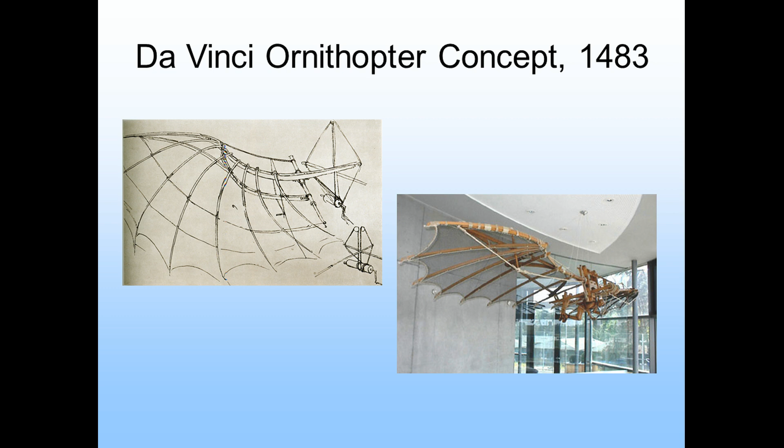So if you're going to buy an ornithopter of your own, you'd go to a science store, or maybe the gift shop at the Science Museum, and buy these plastic ornithopters made in France. They have a little rubber band, and they're called Tim birds. The Tim birds really don't differ in fundamental principle from this aircraft, just in the material.

All right, let's look at past ornithopters, particularly admirable human-carrying ornithopters by Alexander Lippisch. I suppose this is the one place where I don't have to say who he is, but just for completeness, he is a pioneering aircraft designer who developed tailless aircraft, later delta wing aircraft, and ground effect aircraft—what they call WIG, wing in ground effect type aircraft.

But he also had a lifelong interest in ornithopters, and I always found that encouraging, because even though ornithopters became marginalized after the discoveries of Sir George Cayley about separating thrust from lift, some people still maintained an interest in exploring the possibilities of mechanical flapping wing flight.

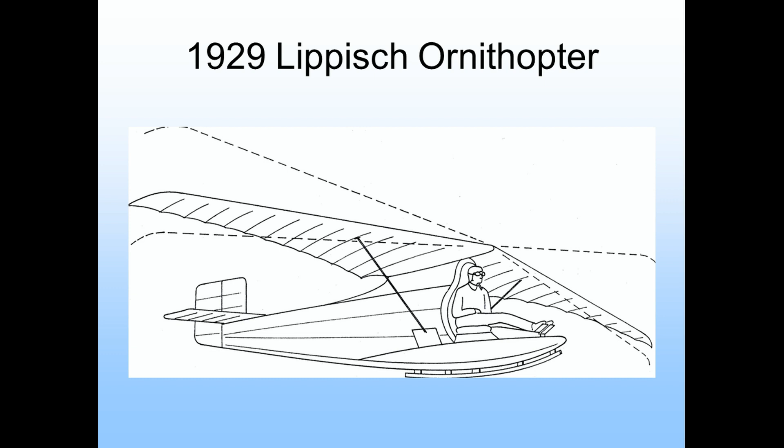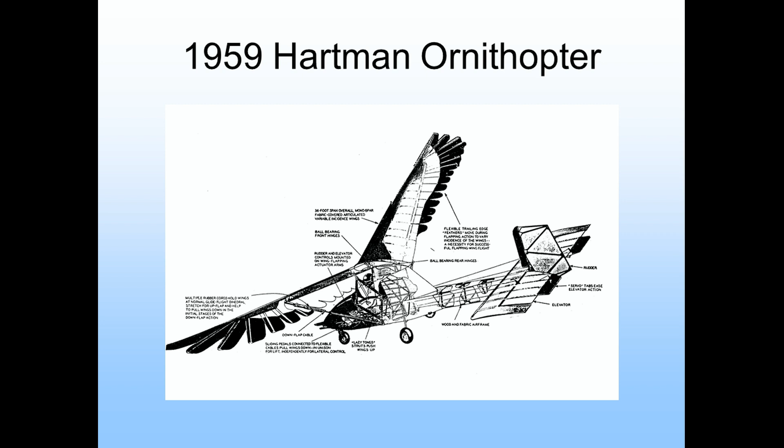Imagine if you were flying and you were trying to nod to somebody on the ground. You'd go into, obviously, a phugoid oscillation.

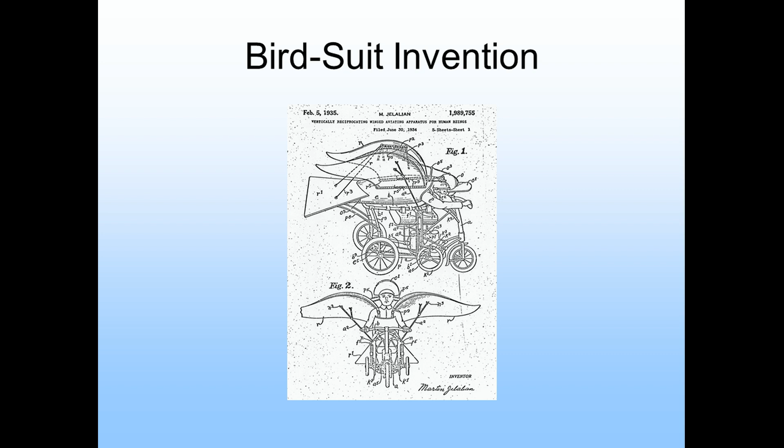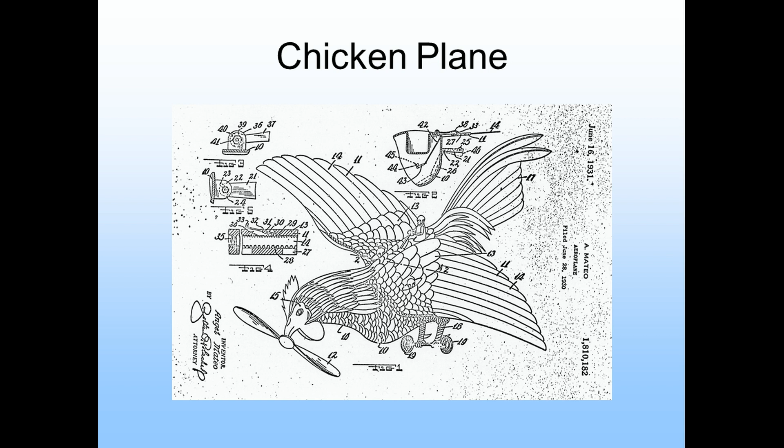There's a lot of hocus pocus about feathers, the role that feathers play for birds' wings. You'll read these articles that in all seriousness will tell you that the feathers valve on the upstroke and close on the downstroke, not really looking at the fact that the feathers overlap in the wrong direction for that. Or maybe there's something about tip flick on the feathers, or the feathers sensing boundary layers. The fact of the matter is this is a mammal's solution to flapping flight, and it works efficiently and well at a size range comparable to that for birds. There are tiny bats about the size of hummingbirds, and large bats that are the size of seagulls or bigger.

I don't know if very many people know about bats. It's a rare occasion to actually live with a bat, but they're not flying mice. They're actually very intelligent creatures, about the intelligence of a ferret. They live for a long time, two or three decades. They sleep most of the time, only waking up to eat and reproduce. Like I said, they're very smart creatures.

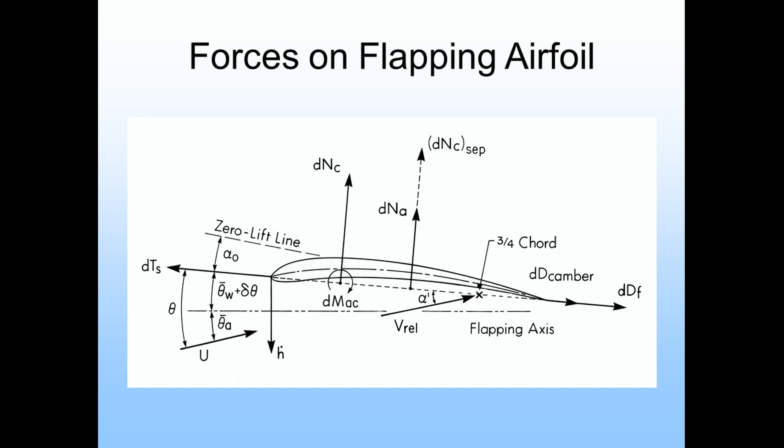This assumes there's no local separation or laminar separation bubbles. This is for a properly shaped airfoil at a high enough Reynolds number that this happens. Which points out that the solution for flapping flight I'm describing tonight is for larger scale ornithopters. It makes no sense at all for small scale ornithopters. There are other solutions that work well at that scale.

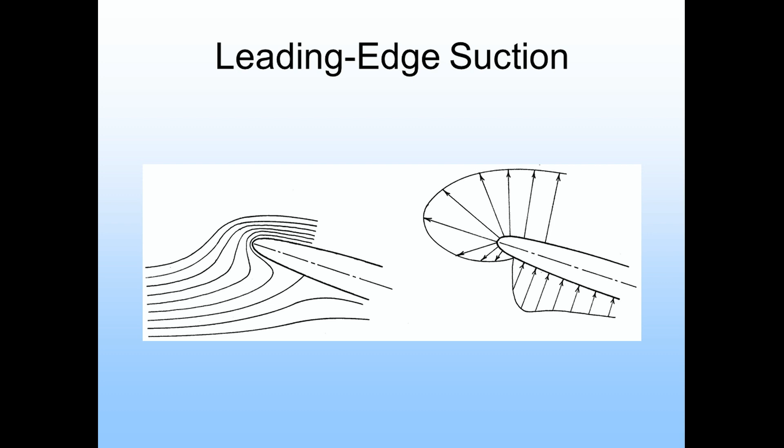Now the reason we do this is because the centers of pressure are aft of the spar, so in the course of flapping the wing up and down, these centers of pressure will act about the elastic axis to give twist. So the flapping is imposed, but the twisting is an aeroelastic response.

Having said that, you'd better be really sure you get the right distribution of twisting compliance built into the spar ahead of time, because you'll have no control after that. If the spar is too compliant, you'll actually take energy out of the flow and won't fly. If the spar is too stiff in torsion, you'll be having massive separation in the course of the flapping, and you won't have any thrust. So you have to get it just right.

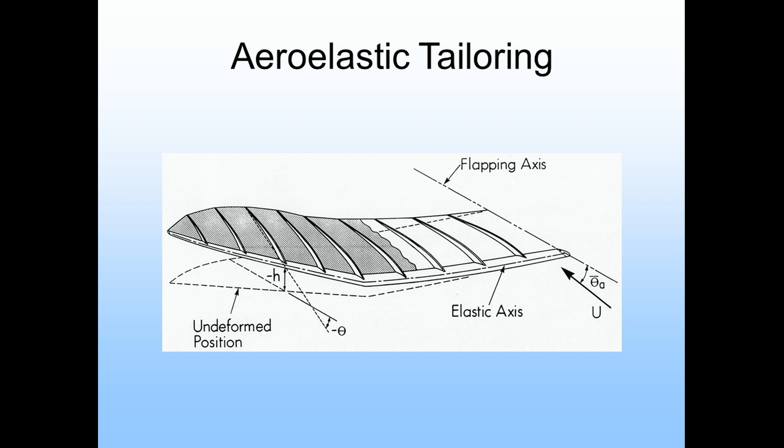The airfoil is very special. This was designed for us by Professor Michael Selig of the University of Illinois. He did it as a favor. I was at a conference at the University of Notre Dame in 1987. I gave a presentation on our work on the ornithopter up to that point for the small-scale ornithopter, and we were trying to use single-surface airfoils with faired leading edges, and they were just miserable. They were awful. He said, well, I can design a special airfoil for you if you're interested. I said, sure, I am. So he did. And there's three very special things about the airfoil.

First of all, there's no specific ideal angle of attack, which makes this different than a lot of other airfoils. Its goodness is actually smoothed over so that it's not real good at one particular angle of attack, but it's pretty good over a wide range of angles of attack, which is important for an ornithopter because you have to go through quite an excursion of angles of attack during the flapping motion.

The second thing is, I told him I wanted some structural depth, because if I have to have the spar right at the leading edge, I can't have this too skinny. I need sufficient depth for the shear web and the spar caps to give me the requisite amount of stiffness and strength. And the third thing is, I can't use a laminar flow airfoil or anything like it, or one of these specialty airfoils you have to build to micro precision, because the way it was constructed, with fabric covering ribs, there's going to be imperfections and little discontinuities. So it has to be forgiving.

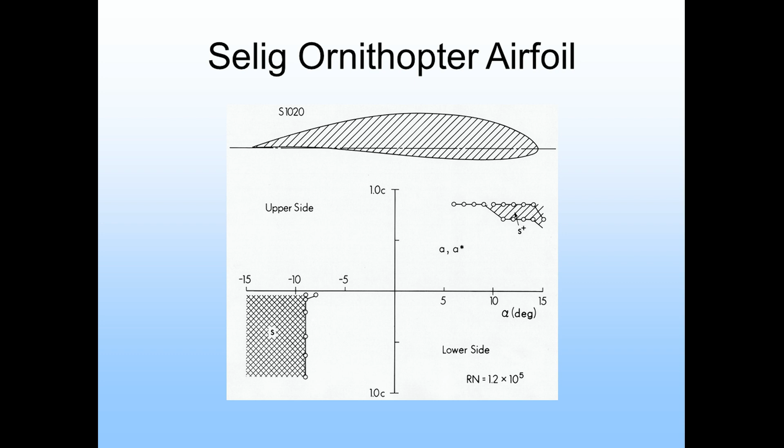Look at this positive angle of attack - this was more important because we fly at a positive angle of attack. This is holding on really well, and nothing is fully separated all the way to 15 degrees. Now this really gets me for a thick airfoil at that Reynolds number. This was from actual experiment, flow visualization experiment, and the behavior of the ornithopter also confirms that that was in fact true.

Okay, so we have a thick airfoil. How do we make the thing twist? All right, that's the next step. That was one of the key inventions for the project.

We do this by means of a structural design we call shearflexing. Shearflexing means essentially you cut the trailing edge, so you're opening up the torque box. Let me explain that in an analogous fashion.

Let's say you have a paper tube. You try to twist it. It's resisting the twisting, right? Okay, take your knife, put a slit down the length of it. All of a sudden, it's very compliant. Okay, look at the end of the paper tube. Imagine the circle morphs to an airfoil where the slit remains at the trailing edge.

So that's the idea. We open the trailing edge, and the torsional compliance goes way down and is dictated primarily by the torsional characteristics of the spar itself. We want to keep the trailing edge from splitting apart this way, so we have these sliding clips to sort of hold it together. And that was good enough for a patent, actually.

It has other applications like variable pitch rotors. You can drive this, it doesn't have to be passive. You grab the trailing edge pieces and move one way and one the other way. You can induce a warp, a twist in a thick wing. We actually demonstrated that with a radio-controlled model.

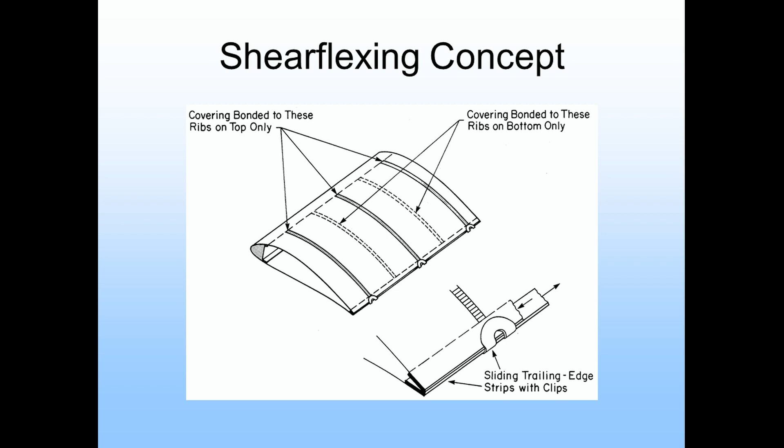Okay, so here's what the model ornithopter wing looked like. This came as the result of numerous computer experimentations. We didn't have an optimization program as such. We were just taking one design and improving on it and tweaking it and finally coming up with a viable solution that would produce the lift and thrust we needed.

The main features are, first of all, it has a cranked spar. The crank is there in order to bring the centers of pressure of the outer portion further aft, which then increases their distance, this lever arm distance, from the inner part of the spar. In other words, it enhances the twisting on the inner part.

If we had a straight spar, we'd have to make this too weak, too small a cross-section to get the linear twist we wanted. By putting the crank in here, we could make this spar a lot more robust, which is where, of course, the maximum bending moments are.

Other things we learned are that the fabric, everything aft to the spar, has to be as absolutely light as possible. The reason being, and you can easily visualize this, is that the most efficient flapping is about 90 degrees out of phase, where the pitching is lagging the plunging. But if you have mass back there, it drives at 180 degrees out of phase. So you really have to keep the mass to a minimum.

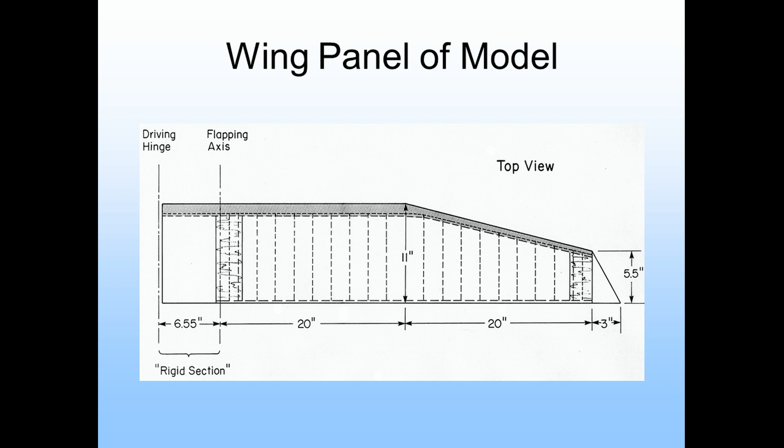Okay, the wing cross sections are just sliced from insulating foam. We tried different types of foam, some exotic foams from Germany. We found just the foam we could buy at Home Depot, the insulating foam, was actually overall the best, which is good because that saved us money. It's 1/8 inch thick and capped with spruce strips. The trailing edge are 2 carbon fiber strips.

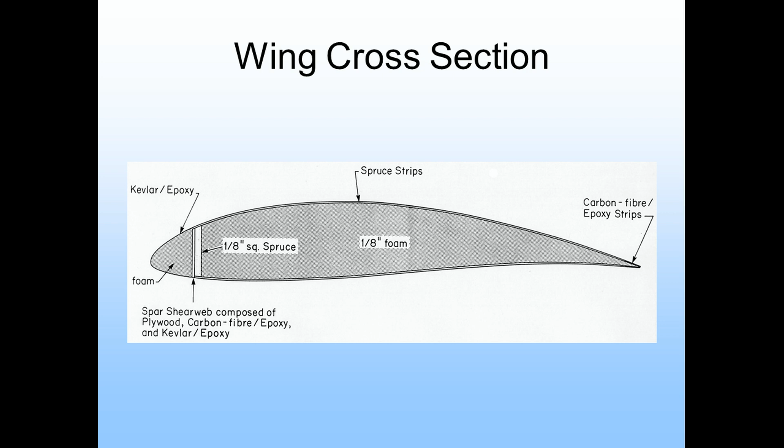Here's the wing spar. This is the shear web and a foam core, covered with Kevlar and epoxy layers. And of course we varied the orientation of the fabric to tailor the GJ, the torsional compliance. The shear web was backed with carbon fiber to give us the requisite bending stiffness and strength.

Okay, here's the model. This is nominally the quarter scale proof of concept model, which led to the big Ornithopter. Here's the engine and the drivetrain, and the center section went up and down on a Scotch yoke type drive. I like these old drives. No matter how clever you are with the mechanism, it turns out some old Scotsman invented it in the 18th century.

It always seems to work that way.

Anyway, this is called the Scotch yoke. Notice that we have a center section that goes up and down, and then we have outer panels that are pivoted on these links, these vertical links.

This was Jerry Harris's invention, who was my research partner in this. He was an engineer at Battelle Memorial Institute in Columbus, Ohio. That means that when part of the wing is going up, other parts are going down, and that helps to balance out the unbalanced force that would be felt at the fuselage.

At all times, we were thinking in terms of a full-scale ornithopter, so we were thinking about the comfort aspects for a pilot. The other thing, too, which is good about this 3-panel design, which Jerry incidentally had obtained a patent on, is that it evens out the power stroke.

You size the engine for an ornithopter in accordance with the peak power required. For a propeller-driven airplane, the average power is the same as the instantaneous power through the whole cycle of the propeller going around. Not so with an ornithopter. The peak power is usually the downstroke, and then the upstroke is a lot less power. Well, if you design according to the peak power, you're going to be putting in too large of an engine. So you want a certain amount of energy storage, and you want to balance out the force required.

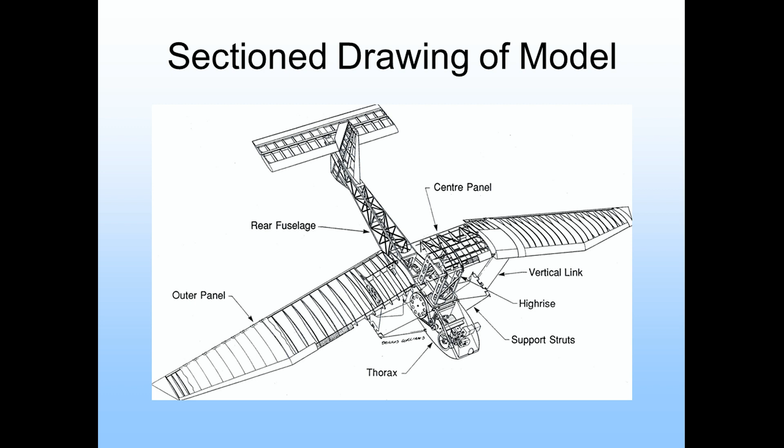Our propulsive efficiency for the model was 50%. Now, that doesn't sound very exciting, because you can make propellers at that Reynolds number with 89% efficiency or higher. But you have to remember that an ornithopter wing also lifts as well as thrusts, and so it has an induced drag associated with it. If you subtract the induced drag, the propulsive efficiency for this model was 89%.

For the big ornithopter, the big flapper, it's even more so. So it's a very efficient way of achieving flapping wing propulsion.

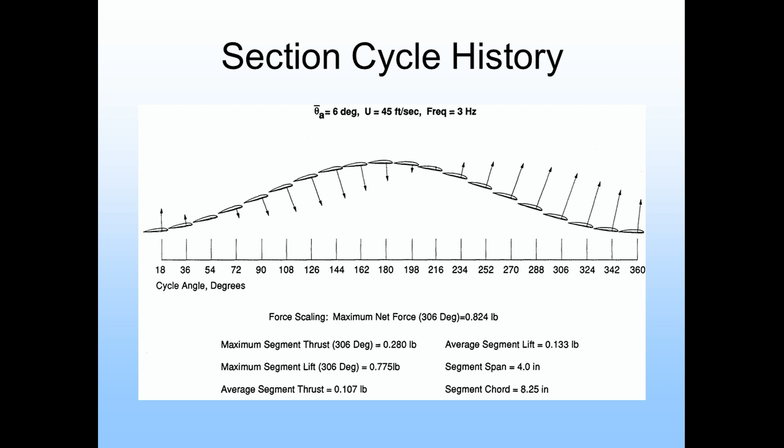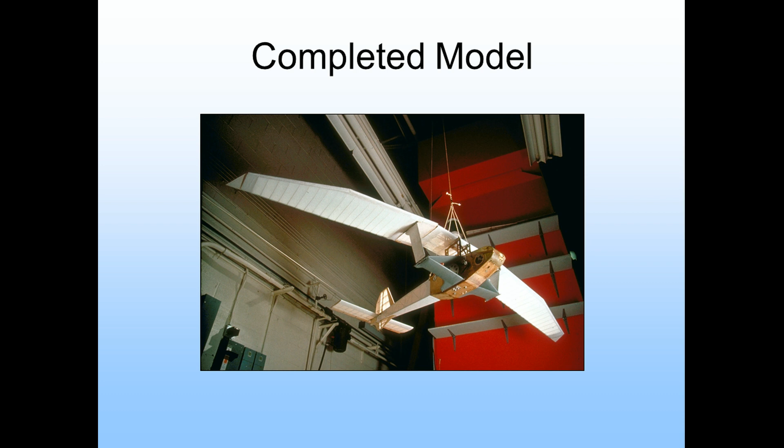Okay, I want to show a video of this.

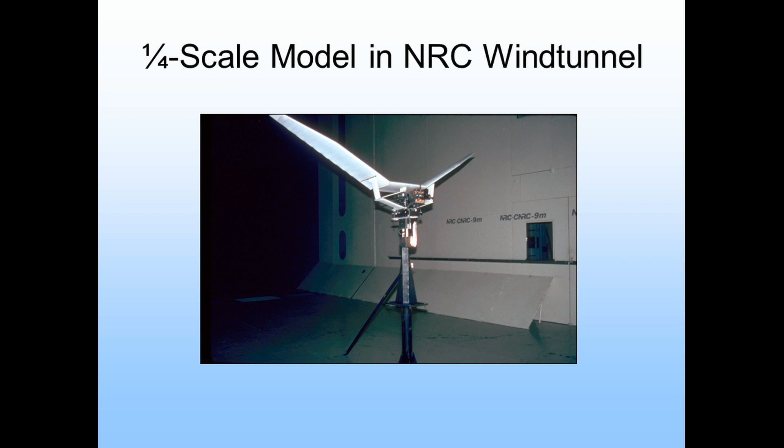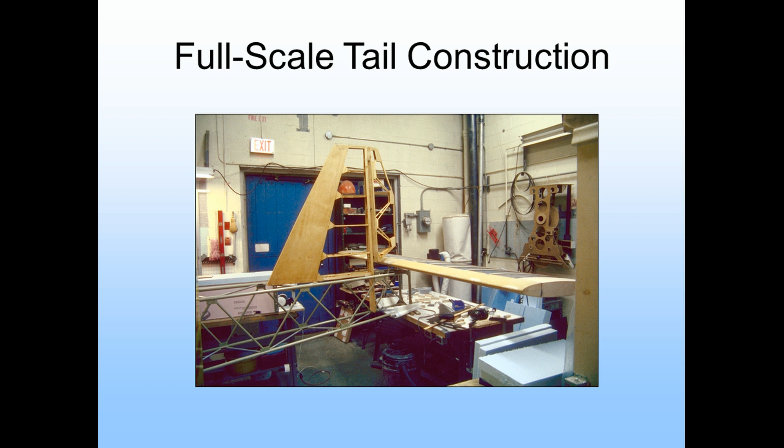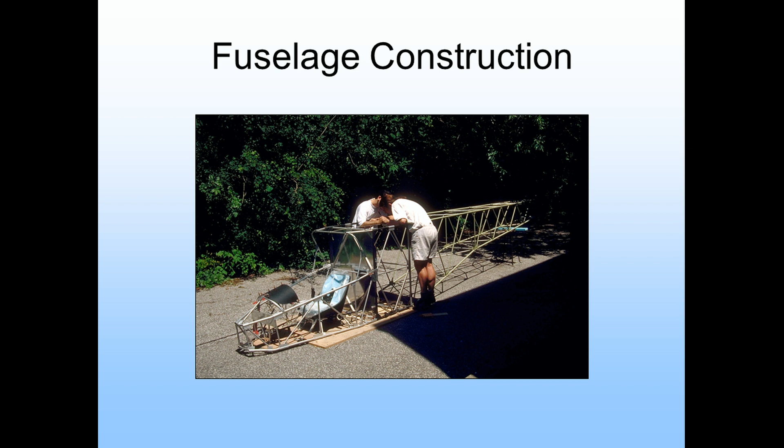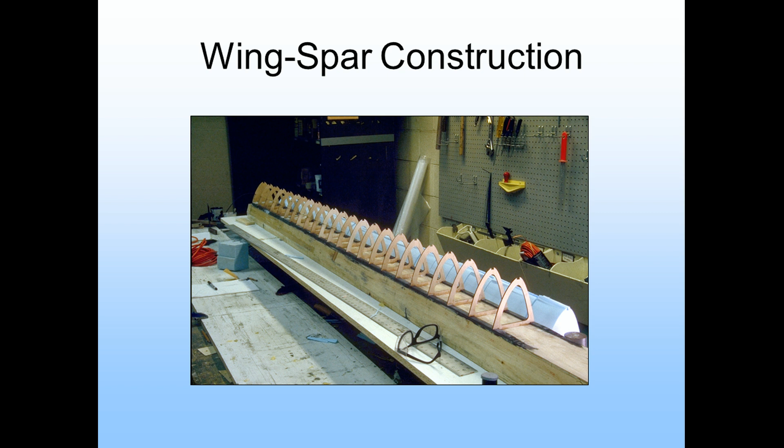Now what really worked out well is the laser cutting leaves kind of a charred surface. If you start seeing the char disappearing, you stop sanding. That worked out well. And we had a carbon fiber piece in the leading edge. Okay, that's the first step.

Next step is we had to cover it with epoxy impregnated Kevlar. It took a while to find the appropriate epoxy. What we used was West Systems epoxy. I called my friend Ray Morgan at AeroVironment and said, we were doing some test spars on the epoxy we have, this isn't working well, what do you suggest? And he told me, and that's what we used.

Notice that we wet the surface, and then it's put down. There are 5 layers of different orientations to give the requisite torsional compliance along the length of the spar. All this was determined by theory, but we had confidence in the theory based on the flight of the quarter scale model.

It actually works out better than using carbon fiber as cap strips on the ribs, because carbon fiber, even if it has sufficient strength, it'll still be thin enough that it might not have sufficient stiffness to locally tear away and buckle from the foam. There's not much grabbing on the foam, the foam will just tear easily. But the wood itself has its own structural buckling integrity that would help prevent that from happening. So wood is what we used.

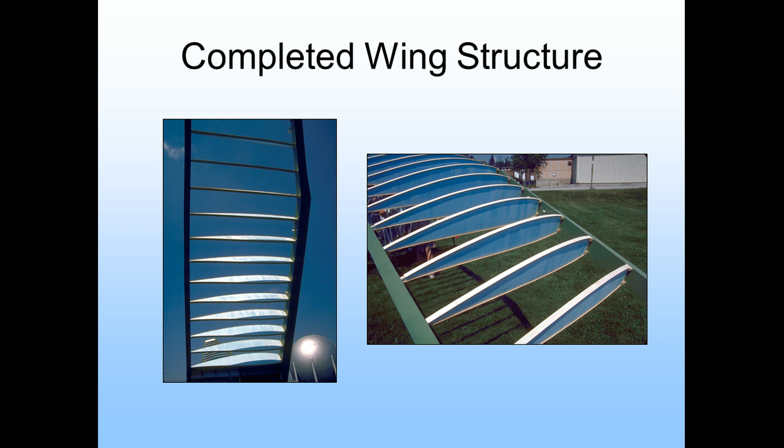So someone once asked me on a radio show, well, does your aircraft have wax on its wings like Icarus? And I had to say, well, yeah, actually it does. That's where the wax is.

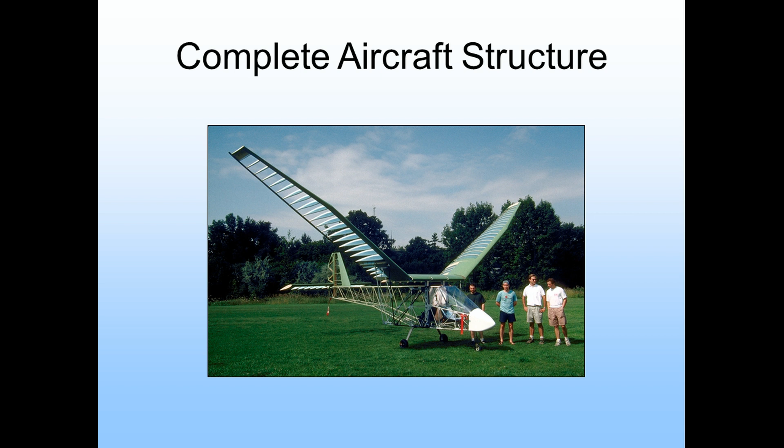Okay, here's the completed aircraft structure. This is in 1996. This was the team at that time, and you can see what it looks like with the covering off. Later on, we had to put a longer landing gear on because the wingtips were too close to the ground, and there were all sorts of developmental issues. But nonetheless, this essentially is the aircraft.

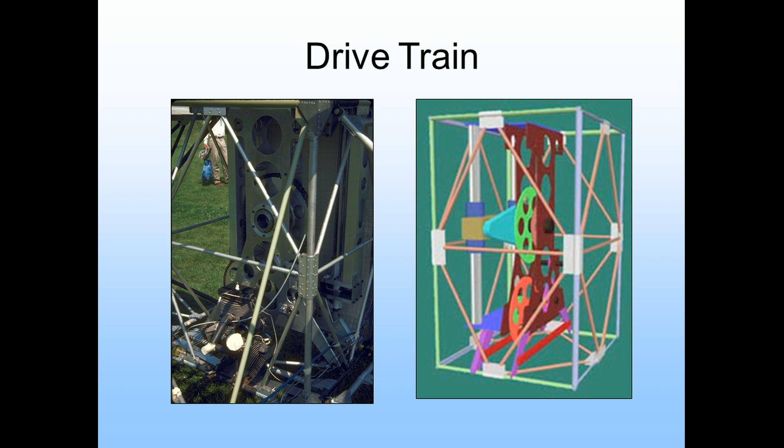Essentially, it's the same as what we did with the quarter scale model.

Our first tests were in 1996, and immediately we saw we're not just going to take off and fly. There were numerous little structural issues, and the undercarriage was too short, and so forth. But that's what you have to do. That's what testing is for. That's why it's called testing.

And we have what's called a Special Certificate of Airworthiness from Transport Canada, which allows us to fly above a runway, but we can't go off and do a circuit, even if we could, because we're in a populated area.

We're doing our testing on the Bombardier runway at Downsview, Ontario, just south of my office at the Institute for Aerospace Studies. It was very convenient. And we're based out of the Toronto Aerospace Museum. They have a hangar there. And of course, what they hope is that when we're done, we'll leave the aircraft there so they can add it to their collection.

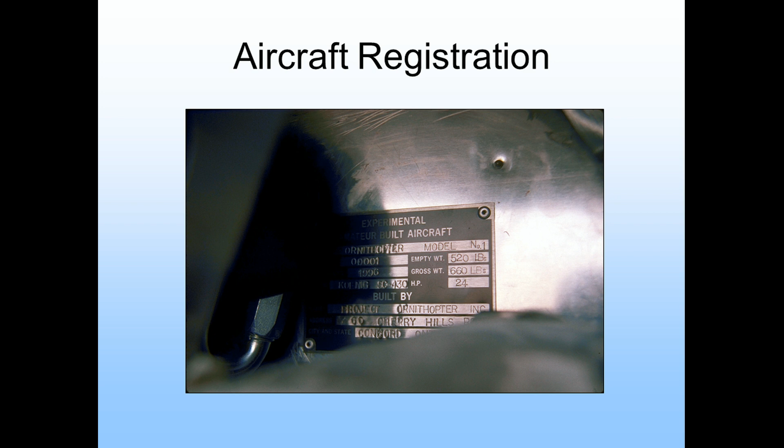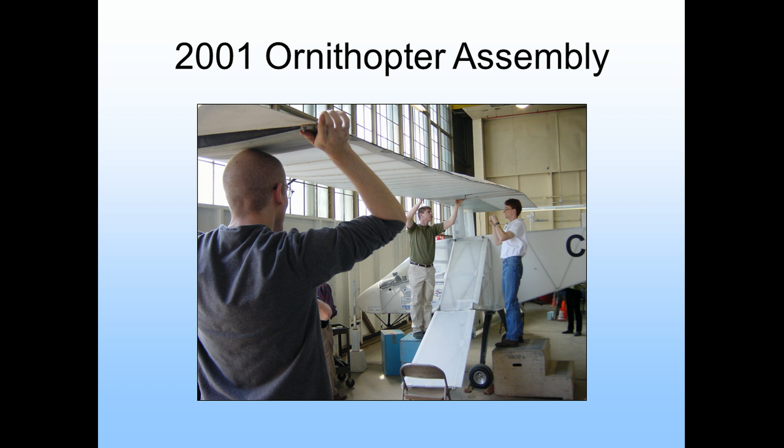This picture I really like because it's so typical of experimental aircraft. You know, a bunch of engineers or technicians hovered around an aircraft. Part of the aircraft is off for access to what's inside. There's the thing they're standing on here, fiddling around. You see that all throughout aviation history. And sure enough, we see that with this particular aircraft.

Notice our registration number, CGPTR. Transport Canada reserved PTR for us. Now, that's an interesting story. Because up until about 5 years before we started construction on this, Transport Canada had a category for ornithopters. They tried to cover everything, helicopters and fixed-wing airplanes and what have you. And they also, just for completeness, had ornithopters. Finally, they said, this is nuts, nobody's ever going to build an ornithopter, so let's remove that category. Sure enough, I call, and the guy said, I know it, I know it, I know as soon as we got rid of that category, somebody called building an ornithopter.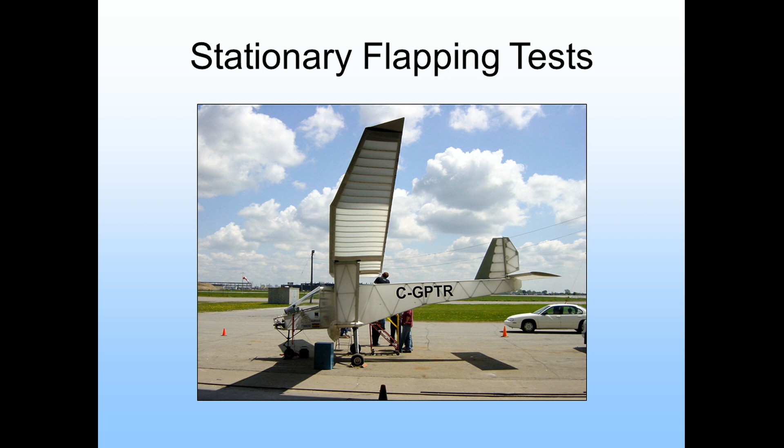But they've been really great, a great help to us. If you're going to build a unique experimental aircraft, talk to them or talk to your certifying agency, the CAA, before you start building the thing. If you show up with a finished aircraft and say, 'Okay, give me a certification,' you're going to have trouble. If you get them in the loop right from the beginning, life is so much easier.

Okay, to fly this thing, since we don't have direct roll control - it's all roll coupling, we don't have ailerons - we have to get up really early so the winds aren't too high. So here we are at dawn's early light, rosy fingers of dawn. Everybody's stumbling out onto the field, half asleep, and a lot of them are students. They probably didn't even bother going to bed. But they're there.

Here's our pilot, Jack Sanderson. Did any of you ever see a movie called Fly Away Home, about geese trained to fly behind an airplane? Anna Paquin was one of the stars, and Jack's a wee little guy - he filled in for Anna Paquin for the flying scenes. He's a superb pilot of ultralight and general aviation aircraft, and we're delighted to have him on the team because he's able to wring every ounce of performance and potential out of this aircraft.

Okay, now typically the aircraft wound up heavier than the design. We were so sure we were building a 600-pound aircraft - we went through the calculations and checked everything. But again, starting from the Wright brothers on, aircraft have always been heavier than estimated. I should not have let that get past me, because the aircraft now is 760 pounds all up.

So we needed help. An ornithopter wing is not happy flying at off-design conditions. It has to be essentially flying at its design condition, at least this particular type of wing - it struggles if you're in an off-design condition. It isn't like I could put more power into it - if I flapped it faster, I'd have structural problems. And it isn't like with a propeller-driven airplane, where you just put a bigger engine and a bigger propeller and take care of business. No, we're stuck with this wing. We have to work with it.

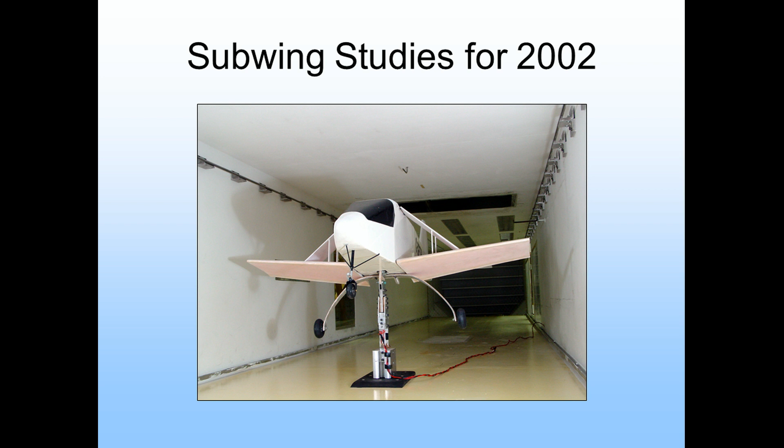So we had to give the ornithopter some help with its lift. Here's a model that's in my wind tunnel at the Institute, where we're investigating putting on a wing of this sort - interestingly enough, that also has a Selig airfoil, a different one of course. So here's the aircraft with the subwing, and that helped a lot. That was something we had to do basically just to get off the ground.

Now some people have criticized this, saying well, it's not a pure ornithopter anymore. Well, okay, we could just say that's it, we're going to go home. Or we could put this wing on and learn something - so that's what we decided to do. Besides, when it comes to what's a pure ornithopter and what isn't, I'm going to leave that to the historians. I've got other things to think about.

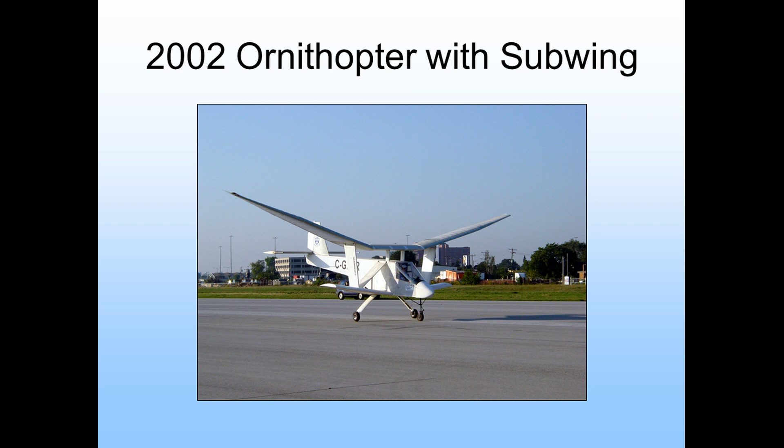People ask me, what's the practical application of the ornithopter? Well, there's no overt practical application - we're just doing something for the beauty of it. But from an academic standpoint, it's first of all been a student magnet. Students have been attracted to the project because where else can you go out on a runway and make a little bit of history? And the other thing too is that it's been intellectually stimulating.

Many theses - fourth-year theses, master's theses, PhD theses - have evolved from this, all on aeroelastic modeling, on unsteady aerodynamics, on topics pertaining to bird flight, topics pertaining to micro-air vehicles. This year, for example, there will be four papers published - three in the Journal of Aircraft and one in the Canadian Aeronautics and Space Journal, all pertaining to spin-off research from this project. This is all for small-scale flapping, but what we learned from this led us to other work.

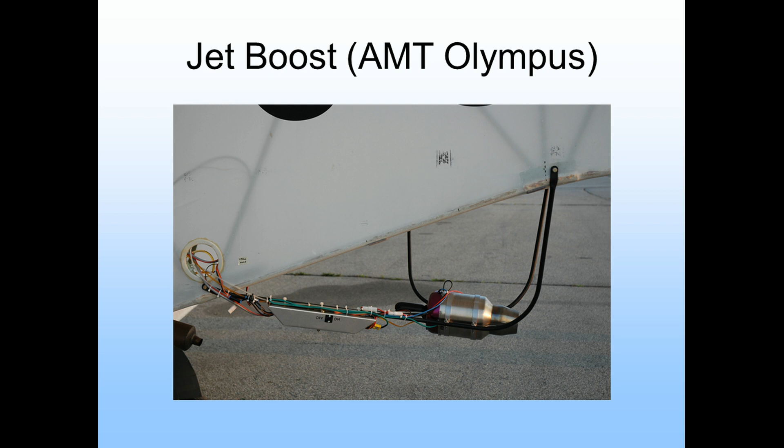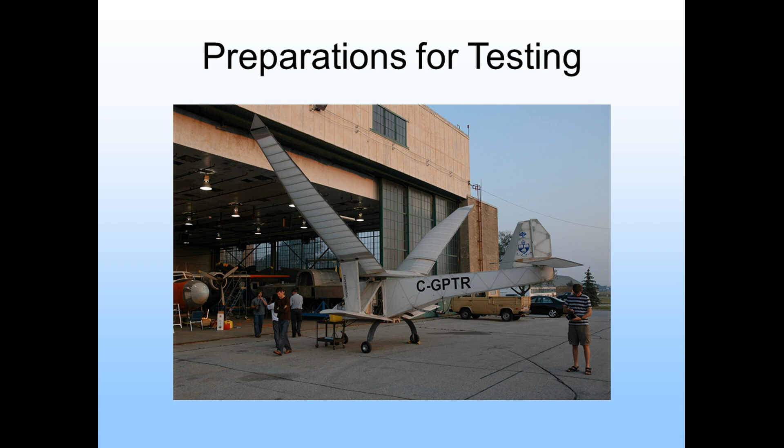All right, I'm going to show the flight from last year. Now, I want to emphasize two things before I show it. When Jack got off the ground, he didn't cut the jet. The idea was to get off the ground and cut the jet, but he kept the jet on for the 14 seconds it was off the ground. So this isn't a pure flapping flight, but the wing thrust is a lot more than the jet thrust, so it was primarily flying from flapping thrust. But nonetheless, we still had the jet going.

Second of all, near the end of the video, you'll see the aircraft kind of wobbling. What had happened was that this was the first time the aircraft experienced steady in-flight loads. And on the left wing, one of the trailing edge strips had localized buckling, which jammed up the shear flexing action. And when you jam that up, all of a sudden you're losing thrust and losing lift, which clearly shows the role that the shear flexing is doing.

Why didn't it happen on the right wing? Actually, a previous mishap caused us to rebuild the wing with a somewhat stronger trailing edge. But we didn't change the left wing because up to that point, there'd been no problem. We had no reason really to change it. But now we have. That's the things to look for. Nonetheless, we were in the air for 14 seconds.

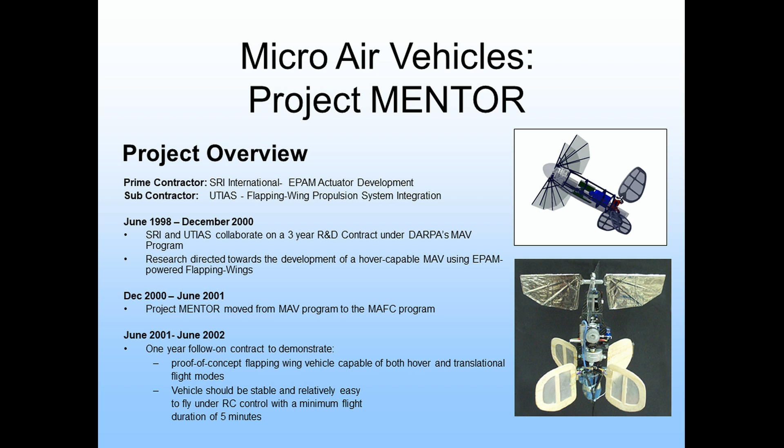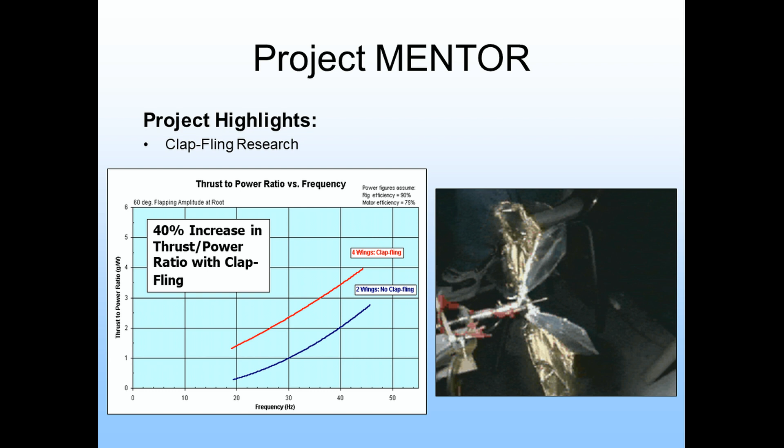Weis-Fogh had calculated the average lift coefficients of these tiny little wasps called Encarsia formosa. He was getting lift coefficients of like 6. Like, okay, what's going on here? These things are at a Reynolds number where to them the air seemed like molasses, and it was the clap fling phenomenon that did it.

Okay, now if you want to see more of these videos and the list of the various publications in the Aeronautical Journal, the Journal of Aircraft, and so forth, you can see that on our website. It's ornithopter.ca, CA for Canada.

Well, James, thank you very much indeed for that presentation. I think 14 seconds, probably a year, a second of engineering and science to support that. I don't think any of us should underestimate what went into that flight. The melding of engineering, of science, of physics, of pure bloody mindedness to overcome the problems, and to some extent to overcome the negative publicity of these grainy films and the mad inventors image. All of that, and I think the youngsters are attracted to it, like you, should feel proud of what you've achieved. And for coming and sharing that with us tonight, very many thanks indeed. I wish you a very successful...